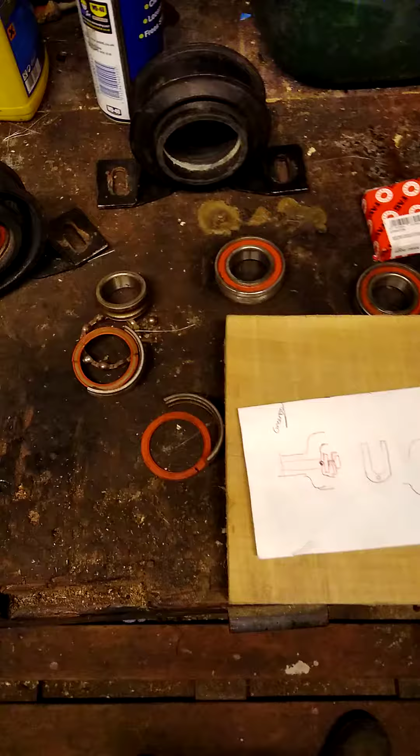For anybody replacing carrier bearings on a Freelander 1, I've had 2 lots of these now off eBay from different companies. The first lot lasted 6 months, the second lot lasted 2 months, and they totally take water in and rust up. As you can see, they're absolutely gone in 2 months.

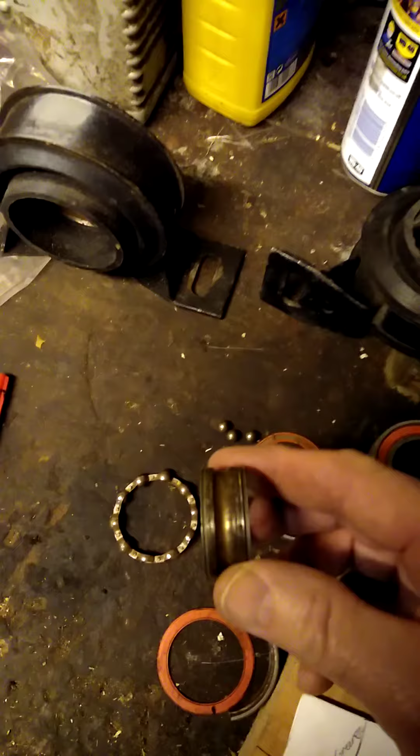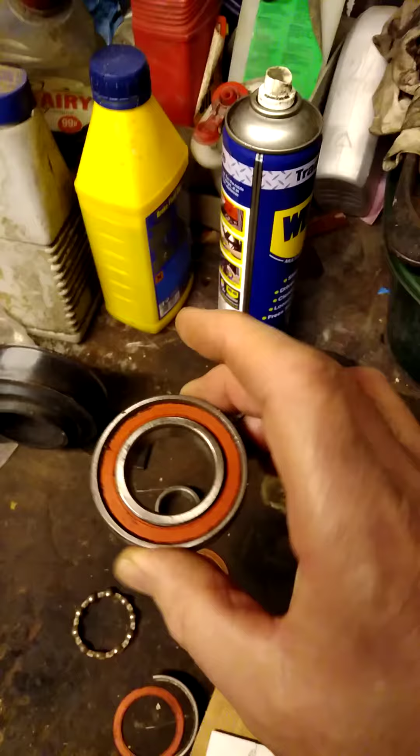So the ones that haven't gone, like this one, are completely seized up. So by all means get the carriers, because they're only pretty cheap with the bearings, but get rid of these bearings that you get with them, because they aren't worth anything. They'll just give you hassle for all the struggle you do to get it in.

Just knock these out. Get something else like this. This is a proper bearing. This is a bearing that you can trust. So it's a proper sealed one, and it won't let the water in, and you won't have the same problem again.

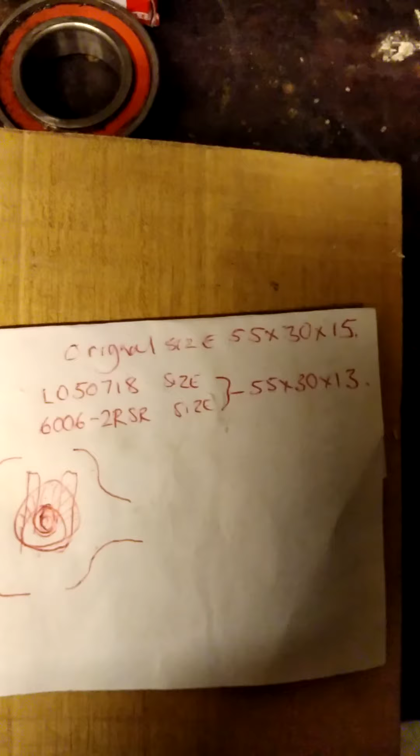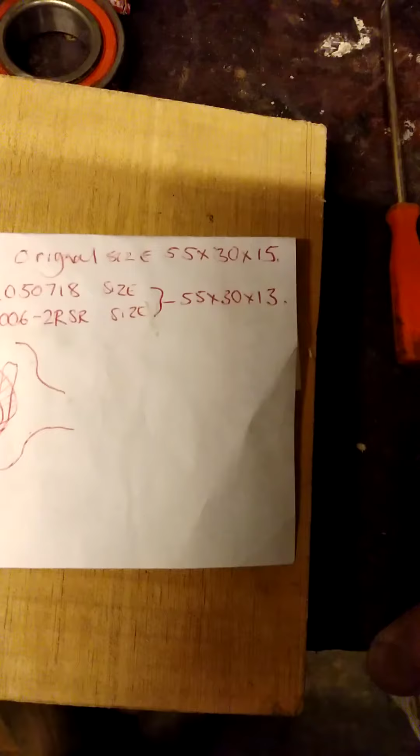There is one small thing - the original ones are 55 by 30 by 15 depth. The depth of the bearing is 15. The new ones are the same, except the depth is 13.

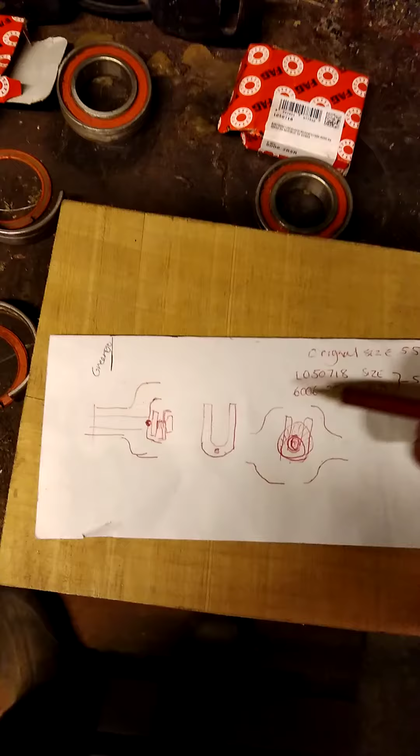So what you really need to do is with the U-washer, the horseshoe washer's got a little piece on there. Now it fits in the side, the knuckle. So if the lock spacer, lock washer comes loose a little bit, it won't drop out. What you can't do is the same with the new ones, because that rubs straight up against here and it won't push the horseshoe flat.

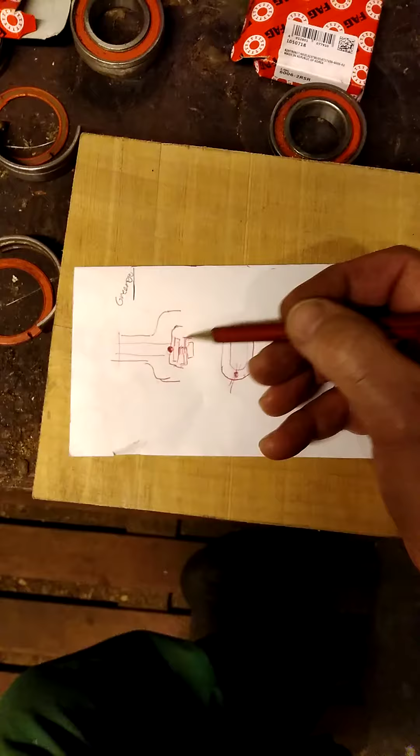So take the nipple off, grind it off, and just put a blob of weld - if you've got a friend with a welder or you've got one yourself - on here, so that horseshoe doesn't drop out, just in case this nut moves back a little bit, within the tolerances of the washer, and then it won't drop out. But I've had these in now for over 2 months, and there's no noise, and they've been fine.

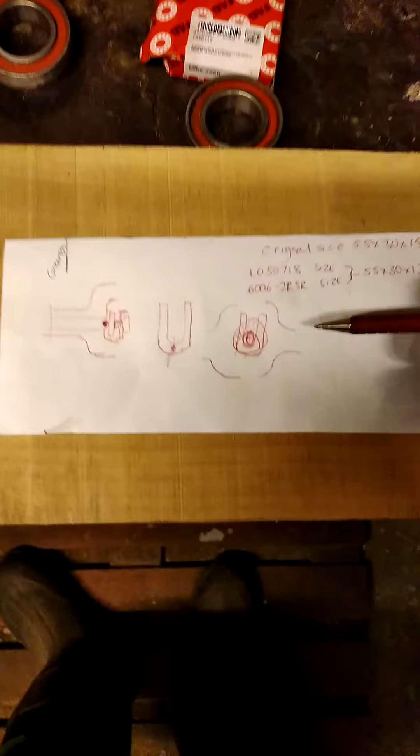So that's just a little update on these. The carriers are fine, but Loctite the bearing in - use some sort of Loctite. I use this one. It only hardens when there's no air, so you think it's not gone off, but it actually has. Where there's no air around the bearing, when you've pushed it in, it's helped keep it in place.

Or just use your original Loctite, which is this one, 270 I think. That'll do it. That's a thread lock, but it's the same thing.

There we go. So I hope that's some help to somebody who's probably fitted these like me twice and had the same problem. They just get water straight in here. The bearings aren't sealed properly and they seize up completely.

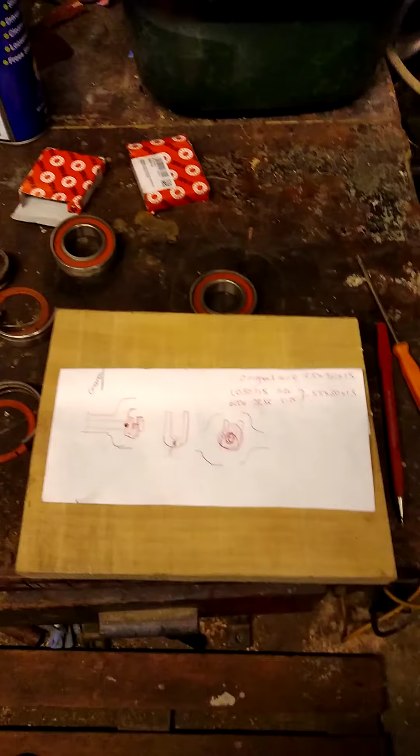So you can solve the problem like that. So there we go, Freelander 1. I mean, mine's an 04 one, so obviously they're not all the same. But there we go, hope that's some help.